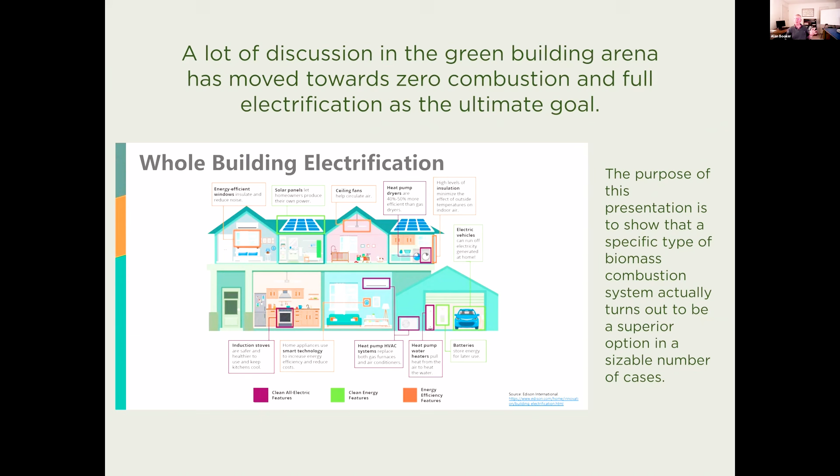Okay. So the purpose of this particular presentation is to show that a specific type of biomass combustion system actually turns out to be a superior option in a sizable number of cases to full building electrification. So I came up with the term carbon negative mass heater because, of course, one of the huge things you hear over and over again is carbon and carbon accounting. I'm a member of several different groups that are looking at the carbon footprint of everything, the carbon footprint of a building, both embodied, how much does the building take to build, and also operational carbon.

Yes, Paul. Thanks for noticing my hand. I was wondering if that would work. But I wish to ask a political question, if you don't mind. Okay. And that is, clearly you are a man of science and climate change. Yep. Are you a person who says yes, no, or maybe?

Yes, the climate is changing. That much is completely clear. I'll put it to you this way. I go out and I talk to fourth and fifth generation farmers on the land, who have history on the land back four or five generations. And to them, there is absolutely no question that what they're seeing today is different than the family history on the same land for four or five generations. So the climate is shifting, and that is, to me, highly evident.

And so what I would say to that is that climate change, however, is a symptom of a complex of much deeper problems. So if you come to listen to everything I have to say at, for example, the permaculture design certification course, we'll talk about climate change a little bit, because I'll talk more about how we have to change our designs to deal with it. But I spend a lot more time dealing with the underlying issues and how to regenerate natural ecosystems, because if we can do that, we'll solve problems like climate change.

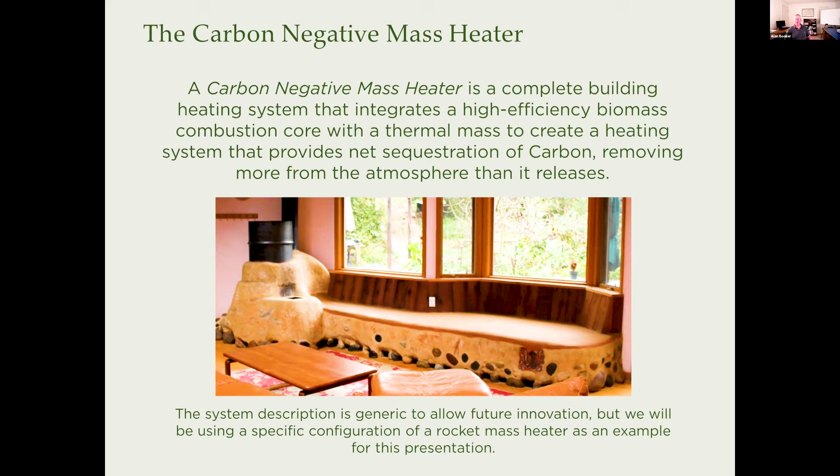So a carbon negative mass heater is a complete building heating system that integrates a high efficiency biomass combustion core with a thermal mass to create a heating system that provides net sequestration of carbon, removing more from the atmosphere than it releases. So as I said, this system description is generic to allow for future innovation. But we're going to use a specific configuration of a rocket mass heater as an example for this presentation as we get into the details.

Okay, so first we have to talk about the carbon cycle just quickly, because we're going to call it a carbon negative mass heater. We kind of need to talk about that, right? So this particular diagram is just a quick example of the kind of carbon accounting that we do as we start trying to figure out how in the world we're getting to the point where we're now over 400 parts per million carbon dioxide in the atmosphere, when pre-industrially it was down below 270, right?

And so we see here in blue what we call pools, that is places that carbon is held. And then in the red, you see fluxes, that is places where carbon is moving from one pool to the other. And these numbers give you a rough feeling of about how much there is. Notice what's interesting here is plants, soils, and atmosphere, just to give us an order of magnitude, okay? So these are petagrams, by the way, but let's just look at relative numbers.

750 petagrams in the atmosphere about now. Plants are around 560, but soils are around 1,500. In other words, we have about 3 times as much carbon sequestered in the soil as we do in plants, round figure. And what you're going to find is the way that I have engineered the carbon negative mass heater takes that dynamic into account quite a bit. We're going to dynamically sequester the carbon into plants and soil. That's what we're going to do in this process to become massively carbon negative, pulling carbon out of the atmosphere and pulling it into the plants and the soil, okay?

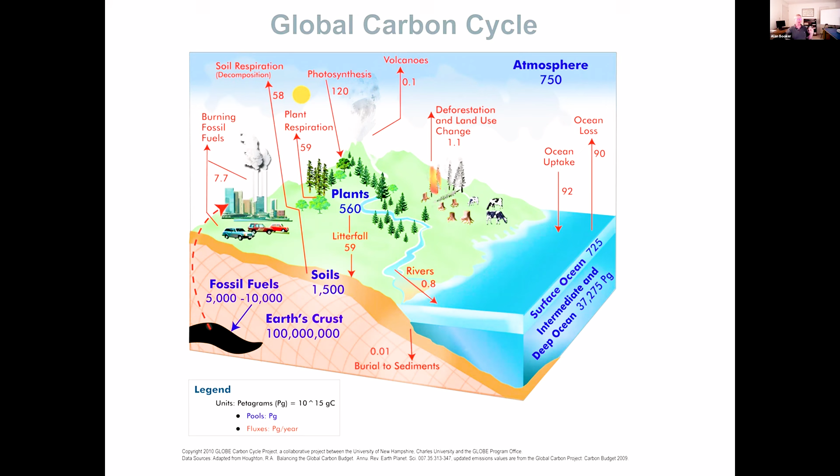So I have a definition that I use when I'm presenting to technical audiences. This is my definition. People are starting to pick it up. And it's what I call dynamic versus static carbon sequestration, because to me, they are very different kinds of dynamics in the carbon cycle. Dynamic sequestration is when carbon becomes involved in a life process that keeps it out of the atmosphere during the period the carbon is involved in that process. Typically, some carbon atoms are leaving as others are joining, but the net total carbon sequestered is either constant or expanding while the life process continues.

And that's where we talk about the plants, but also the soil, because a lot of soil organic matter, which is where we generate a lot of what's called soil organic carbon, is created by life processes, specifically microorganisms in the soil, either saprophytically breaking down organic matter from the soil surface, or actually to a larger degree, building soil organic matter based upon carbon given to them by the exudates of plant roots. So that is what we call dynamic sequestration, because obviously, if you cut down the forest and burn it, it goes back into the atmosphere. If you get rid of the living cover over land, then the soil organic matter will begin to break down, will photooxidize, and

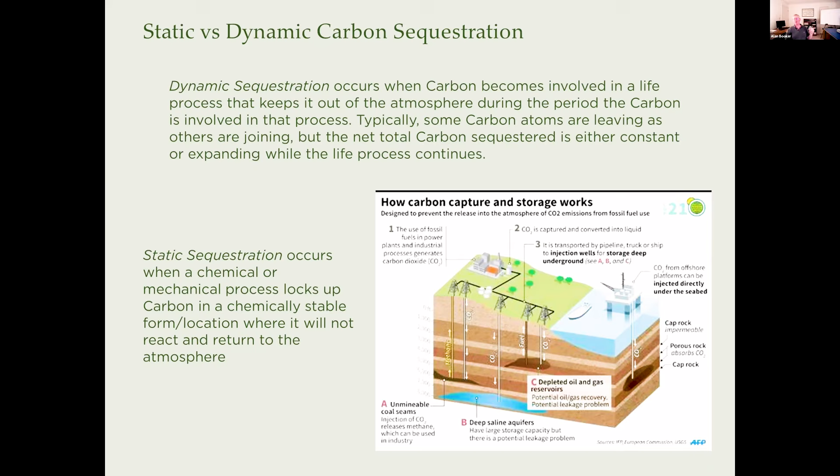But if you want to pull what we already have in the atmosphere back into some sort of sequestration, then dynamic sequestration has a lot of advantages because it is a process that we can do for very low cost at very large scale. So, of course, where we are is that fossil fuel carbon release has been taking carbon that was statically sequestered in the earth and turning it into carbon dioxide. That's why I said before, we were raising levels from around 270 parts per million before industrialization to over 400 parts per million today.

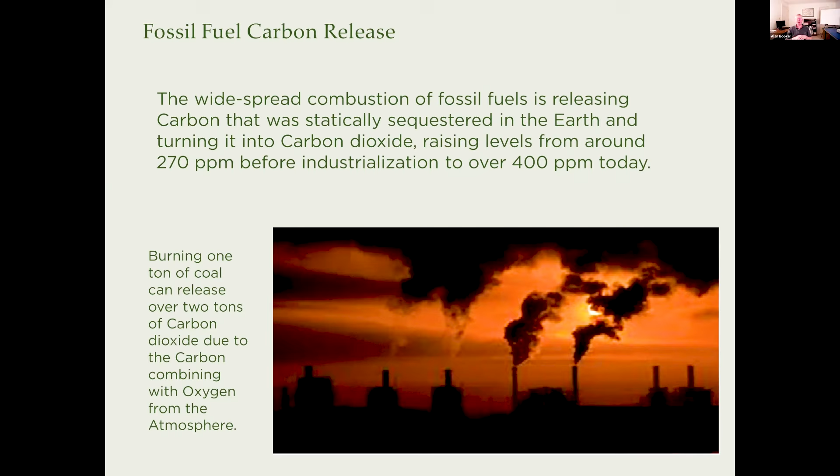And so when we start talking about tons of carbon dioxide, you have to realize that burning 1 ton of coal will release over 2 tons of carbon dioxide because coal is almost pure carbon. It's very high carbon. So you get a ton of coal and you burn it, then the carbon is pulling oxygen atoms out of the atmosphere and burning them. And now the atomic weights of the carbon and the oxygen are combining to create a heavier thing called carbon dioxide, which is why burning a ton of coal actually releases over 2 tons of carbon dioxide into the atmosphere.

Okay, so this is where the possibility of dynamic sequestration comes in with forest carbon sequestration. There is also mangrove sequestration, which is huge. And then there is sea forest sequestration, which can also be huge. But for what we're looking at today, the part of the carbon cycle that we're looking at as our sequestration mechanism is the carbon cycle of terrestrial trees.

Most people don't think about it, but when we think of a tree, we think of a tree growing up out of the ground. And that's actually not a completely accurate way of visualizing it, because 90-some% of the mass of a tree comes from carbon, oxygen, and hydrogen. And the vast, vast majority of that carbon is actually pulled out of the atmosphere via photosynthesis. And of course, water comes in from the roots, and oxygen coming in from certain other processes.

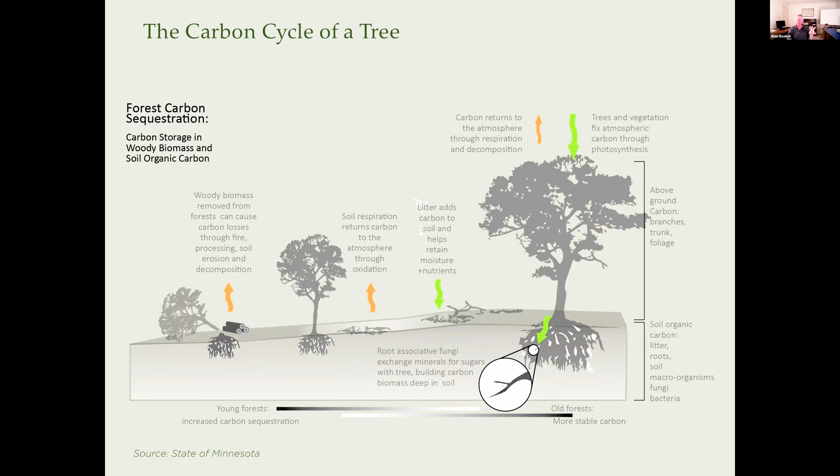But it's almost as accurate to think of a tree as condensing out of the atmosphere as it is to think of it as growing up out of the soil. That's how much of the mass of the tree is coming out of the atmosphere, right? And at the same moment, you have to realize that there's a huge amount of excess energy from photosynthesis going into exudates into the soil that's feeding the soil life to create soil organic matter. And it can actually outdo the amount of carbon that we end up sequestering in the biomass of the tree over time. So we have to look at both of those in order to think about how we're pulling carbon out of the atmosphere, right?

You pull it up out of the ground, you burn it, and then the carbon goes up into the atmosphere, at least until we figure out a way of capturing it at combustion and putting it back. But of course, when you burn it in something like a vehicle, that's open cycle for now. We don't know any way of grabbing the exhaust coming out of the back of your vehicle and taking that carbon and doing something with it, right? Maybe we could retrofit power plants and other fossil fuel burning things, maybe, we'll see.

But in the closed loop biomass, what we end up with is growing forest removing carbon from the atmosphere. And then of course, bioenergy from forest biomass can substitute for fossil fuel energy. Well, that gets really big and industrialized. I find that a lot of our regenerative systems work better as a smaller, lower tech distributed system, which is what we're going to be talking about here. And then when you combust it, part of that carbon dioxide is returned to the atmosphere, but only part. And that's where our possibility is.

Now, one of the big complaints about biomass combustion has been that there are a lot of biomass combustion approaches where they're cutting down forest over here and turning it into something like pelletized biomass, and then putting it on trucks and shipping it a couple states away and burning it there. And as soon as you do that, you've got several problems. And that's not the system we're talking about. As a matter of fact, you're going to see we have defined the system that's not allowed.

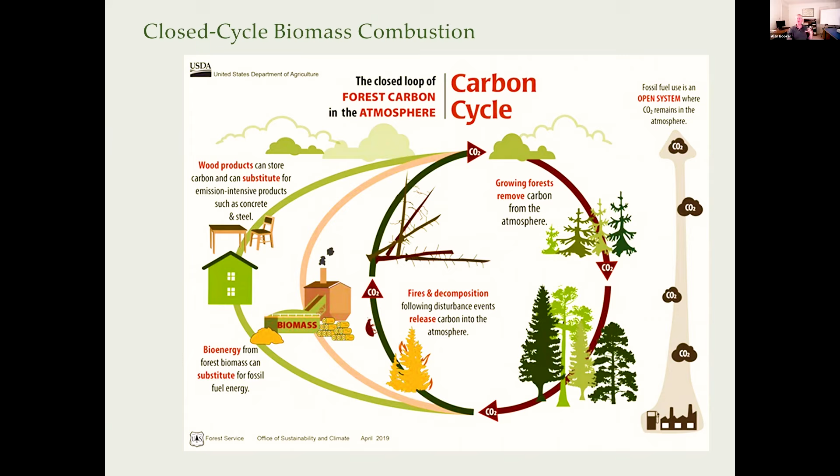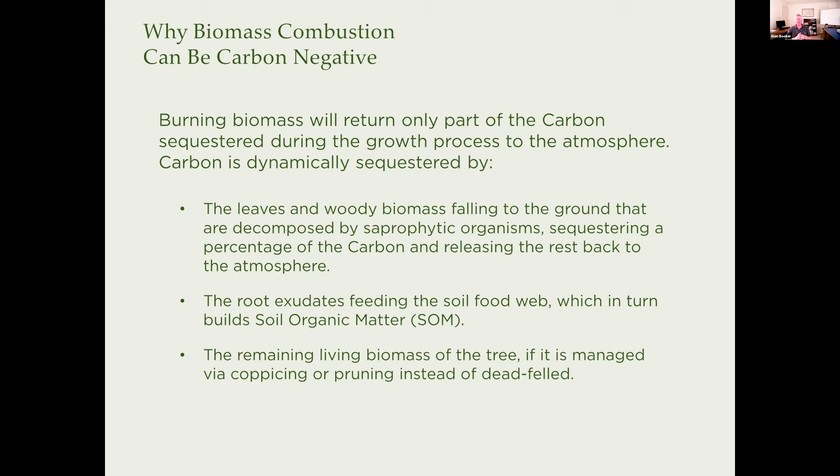Okay, so now let's summarize why biomass combustion can be carbon negative. Burning biomass will return only part of the carbon sequestered during the growth process to the atmosphere. Carbon is dynamically sequestered by the things I've mentioned before: leaves and woody biomass falling to the ground, being decomposed by saprophytic organisms, roots feeding the soil food web, and the remaining living biomass of the tree if it's managed via coppicing or pruning instead of dead fell.

Okay. All right. Now let's get to the definition. How are we going to define a carbon negative mass heater? It's a system, and therefore let's define the system components. The first component of the system is on-site or local regenerative biomass production. Regenerative biomass production that builds soil organic matter is the key to making the system carbon negative. Keeping production on-site or hyper-local eliminates embodied energy of transport and the problem of cutting ecologically important forests for biomass.

Production options include coppice, pruning, stormfall harvest, or regenerative forest management. And that could include proper regenerative thinning cuts and other regenerative forest management techniques practiced locally, okay? Our case study, when we get there, is going to be of the coppice system. And the reason is I'm able to show exactly how carbon negative we can go using a bunch of research we found on coppice, okay?

But stormfall would include some of the things, Paul, you've talked about, which is you can go out and gather sticks and wood and so forth that just comes to the ground during storms. You can use pruning as you go in and prune food forests or other areas, or actually any wood that comes from very local on-site regenerative forest management.

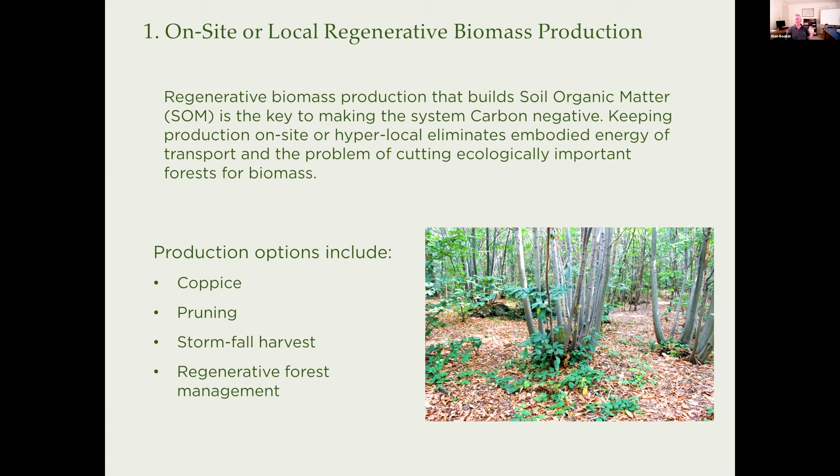Our goal here is to, as you'll see, there's other components here that are equally important. And the next component that we go to is to drastically reduce the amount of wood we need so that the number of cases that we can do step one is much higher.

Yes. I want to ask something from the previous slide real quick. You've shown a lot of different systems for where our carbon might be coming from, and in order for it to be a carbon negative mass heater, then the fuel source is critically important. Yes. I'm getting to the point now where I think that there could be an apartment somewhere, and it could be heated where they have effectively a rocket mass heater. And I don't know, maybe we could make some modifications to a rocket mass heater, or maybe as is it'll work.

But for the most part, having them save their cardboard boxes that they get, like they had something delivered in a cardboard box over the summer, and they saved all of that. And then if they were able to heat their apartment over the entire winter using nothing but the cardboard boxes and other papery goods that they naturally accumulated in their waste over that year, would that qualify in your mind as a carbon negative mass heater?

I have to do the numbers on that. I can't tell you right now. My feeling is that we're going to have to run all the carbon numbers. You're going to see we're running numbers here. We're not just waving hands. So I can't answer that question.

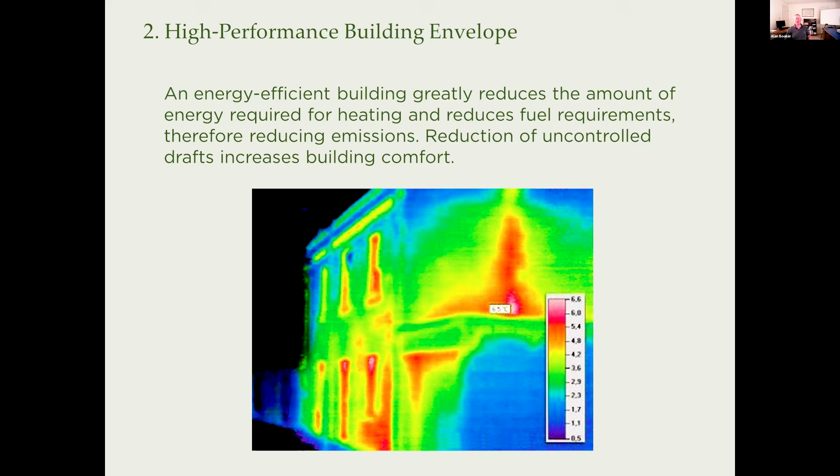What you're seeing here is when we do HERS ratings, which is Home Energy Rating System ratings, we use infrared cameras like this to see where the buildings are losing significant amounts of heat in the wintertime. And so one of the aspects of this system is that it's coupled into a high performance building envelope, right? And there's a couple different ways we can do that.

Strategies would include a properly insulated building. As you saw, I'm a green roof professional, so I use green roofs on buildings, drastically reduces the energy footprint, and also cooling, drastically reduces cooling when done properly, passive solar gain, and thermal mass and thermal inertia. We use all of these strategies so that we move towards the rocket mass heater or the carbon negative mass heater being an auxiliary heat to some other methods, such as passive solar and annualized thermal inertia, or daily thermal inertia, according to where you are, right?

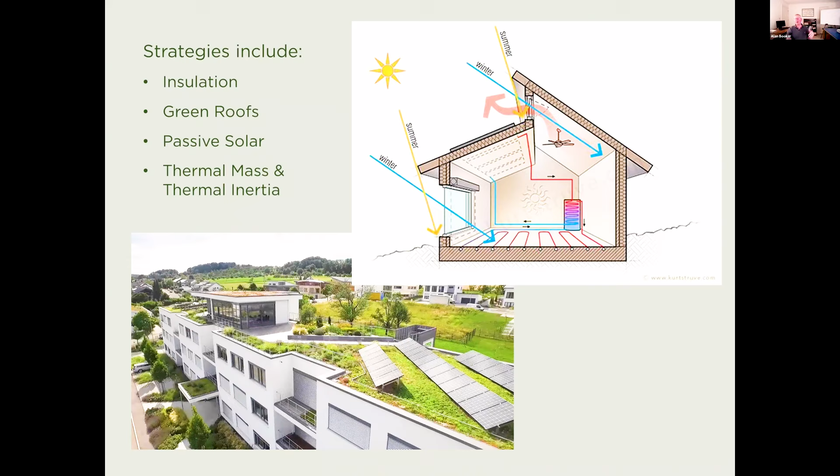Because according to where you are, your thermal inertia strategies are different. If you're in a, again, desert environment with high diurnal swing, then you might be doing diurnal thermal inertia. If you are in an area like Montana, you might be doing annualized thermal inertia. That's a valid way of doing it. Passive solar is available in many areas in the temperate zones, and green roofs are a huge moderating effect. And I don't have time to get into all that, but those are some strategies we can use.

Okay. Third part of the system, makeup air and IAQ management system. This has to be engineered into a carbon negative mass heater system. So a combustion heat system needs a low resistance source of air for efficient operation. Many manufactured approaches, that's wood stoves and so on and so forth, use a fresh air vent coming from outside. But certain high efficiency combustion cores function better using room air. If this is the case, a source of makeup air is needed to replace what's being used by the heater.

Whatever the solution, it needs to maintain a high indoor air quality, IAQ. Remember, I'm having to build buildings that meet the WELL Building Standard, right? And so I have to think about, if I'm going to use combustion, here comes the next set of questions. What about indoor air quality? So we're going to have to address that, right?

So if the building is not tight, air will be pulled in through cracks, creating drafts and reducing performance. If the building is tight, this can create negative pressure, causing a number of problems. And in the worst case, it can cause backdrafting, right?

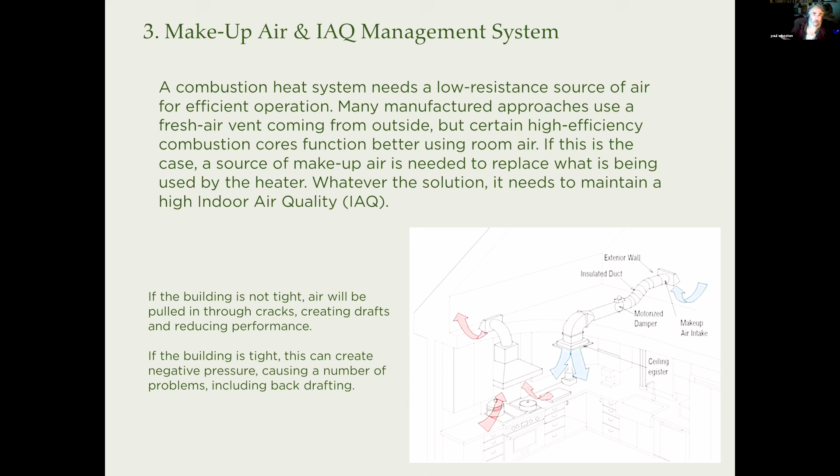So one possibility, if you want the high-tech solution, is a DOAS with ERV. Yes, these are the industry terms for it, right? A dedicated outdoor air system called a DOAS. Here's the thing, when you are in a system where you have an engineered heating and cooling system and you are heating with radiant heat, the radiant heat does not solve your ventilation problem, right?

So if you have a bunch of people in the room, even if the mass heater is not contributing a single bit of carbon dioxide to the room, the people are. And you'll start seeing the carbon dioxide build up in the room. So even if the carbon negative mass heater is providing all the radiant heat you need, you still need ventilation if you have enough people in the room.

Now, we've been doing some measurements. One of the architects I'm working with, Gary, has been measuring CO2 in his bedroom when he and his wife are sleeping. There's nothing except a radiant heater in there, and there's no demand ventilation. He just closes the door and they sleep at night, and they see CO2 going up to like 1,500 parts per million as they sleep, which actually contributes to poor sleep. So he's had to actually do things to remediate the ventilation.

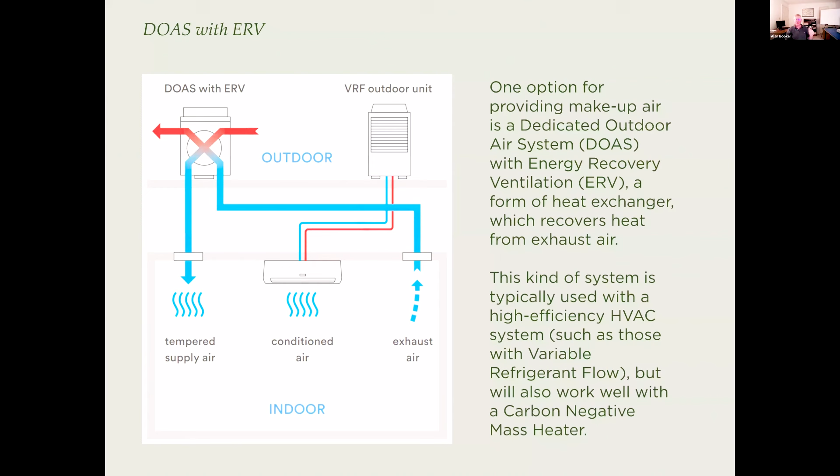So you could use a DOAS with an ERV. And in certain larger building situations, that's where we might have to go. If you want the low-tech version, or maybe the higher-tech version, because it actually is completely passive, you can use passive geothermal ventilation with annualized thermal inertia. And this is a conceptual diagram of something I'm using here in the Southeast right now.

We are basically putting about a 120-foot run on this pipe, okay? You can see there's an intake well out at one end, and then what's called the ATI, annualized thermal inertia, zone around the pipe. It then bends up at a 45-degree elbow, because a 90-degree elbow would present a huge amount of resistance to passive airflow, right? And the whole thing drains away from the building at a minimum of a quarter inch per foot of run. And what you end up with here is you design the building for passive chimney effect.

As the rocket mass heater is heating, the hot air rises and a little bit of it escapes out the top as a chimney, and it pulls fresh air in. So we're using the energy that's coming from the rocket mass heater to drive the ventilation as well, okay?

Now, the fun thing that's happening is that this is engineered in such a way to create a 6-month lag. So when you do ventilation in the wintertime, the ATI zone around the pipe has been pre-warmed over the summer. And then over the winter, you're pulling heat out of it and chilling it.

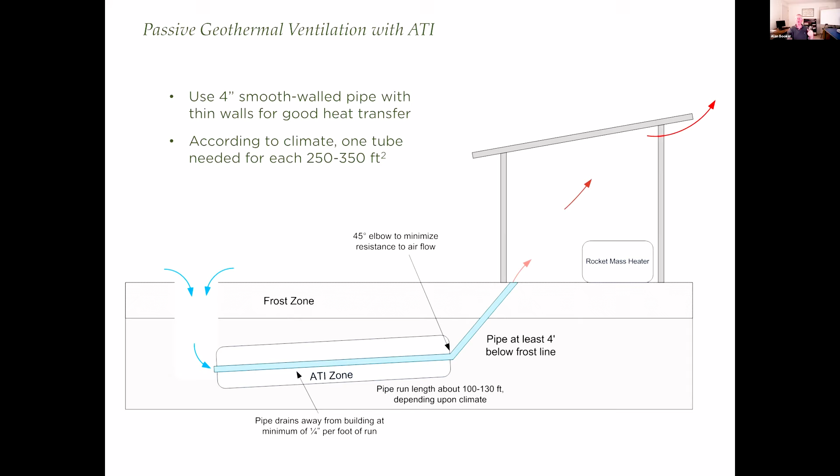There's some details we can get into in full detail. But if we're in a high radon area, we would have to engineer for that. Okay. So yes, you can engineer for that. But again, this is designed where we can run cleaning through the pipes quite frequently. It's just part of the maintenance of a system like this. And we'll just kind of go on from there.

So let's talk about IAQ measures real quick. So I always design to meet tier 2 of the enhanced air quality requirements of the WELL Building Standard. For people who are familiar with the WELL Building Standard, this is version 2. And so what that means is that I'm wanting to make certain that PM 2.5 is 10 micrograms per cubic meter or lower, and that PM10 is 20 micrograms per cubic meter or lower.

Now, what in the world is PM 2.5 and PM10? For those who aren't familiar with all this verbiage, PM, of course, stands for particulate matter. 2.5 stands for 2.5 microns or smaller. 10 stands for 10 microns and smaller. And they tend to come from different places. A lot of your fine combustion particles can come as PM 2.5, but there's other things that can come in under PM 2.5, including pollen and so forth. Some of your larger dust particles come in as PM10 and so on.

So we're trying to make certain that we have in the building these very low particulate matter levels, which means we can have no backdrafting. If we have backdrafting, we're going to get particulate matter into the air of the building. That means that makeup air has to be done properly so that we never backdraft, right? And that the system has to be designed to run properly so that there is no backdrafting.

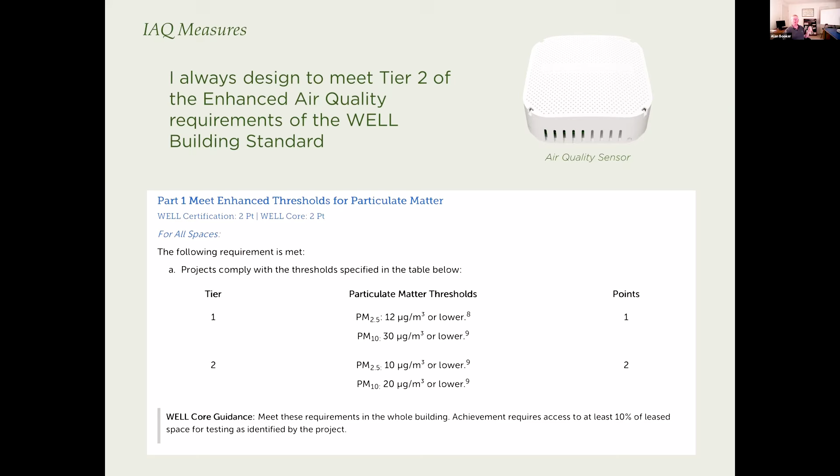If PM goes too high because of the heater, it's not designed right. It fails the standards for meeting the definition of a carbon negative mass heater. Okay. Another thing is organic gases, also known as volatile organic compounds.

I see Bo has a question, so let me see if we have anything we need to address real quick.

Yeah, Jim asks what should be the separation if using more than one pipe in such a system. Yeah, I typically am trying to get one every about 250 to 300 square feet of building. And so I try to keep them at least 10 to 12 feet apart, because you don't want them to run into each other's ATIs, right? And the ATI zone typically can be 4 or 5 feet around. So I try to keep them far enough apart that they each have their own ATIs.

Okay. Anything else, Bo? No, that's great. Thanks.

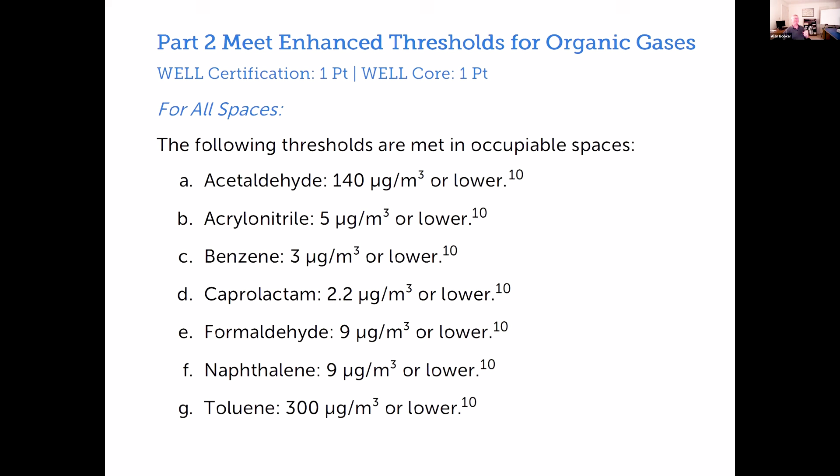Okay. Part 2 of the enhanced is the volatile organic compounds. Well, if you build a carbon negative mass heater out of the materials recommended, then it will not off-gas any of these, either into the building or as external exhaust. So don't have to worry about that. How about carbon monoxide and nitrogen dioxide?

If you have a properly running carbon negative mass heater, during combustion, you will meet this in exhaust outside the building, right? Which is really funny because this is indoor air quality, right? And if we're drafting properly, no carbon monoxide; if any is being made during the beginning or the end of the burn, what little bit is being made should be going up and out the chimney. It should never be coming back into the building. Same thing with nitrogen dioxide.

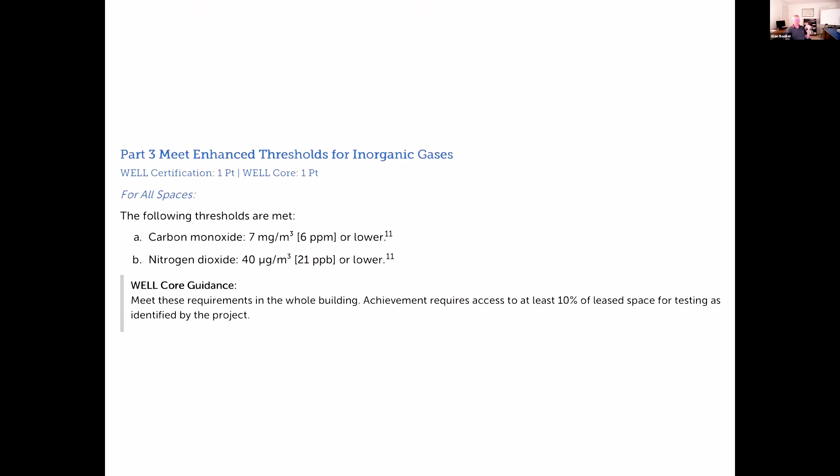If we have a properly running, for example, rocket mass heater, in most cases during the clean part of the burn, which is the vast majority of the burn, these two would be met at the exhaust coming up the chimney, okay? So we're meeting all of that, right? And of course, the last one we want to look at is indoor carbon dioxide levels.

Now, the WELL Building Standard requires demand controlled ventilation, DCV, to maintain regularly occupied spaces below 750 parts per million of carbon dioxide. I personally prefer 650 parts per million as the upper limit, because sensitive individuals start to feel it above 650. So what I'm looking for is a demand ventilation system that's bringing in enough fresh air to keep the indoor ambient below 650. 750 would be my high end.

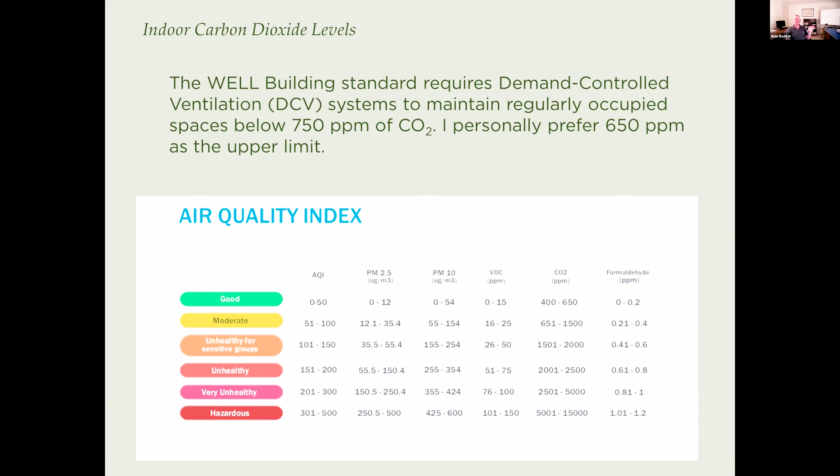You'll see some places that set their demand ventilation at 850 or even 1,000. I don't like that at all, because I think that up to 1,500 is moderate. There has been research, I won't cite it all here, that people start to get very measurable decreased cognitive function at 800 to 850, okay? So I try to keep it around 650, definitely below 750, okay?

So now we get to part 4, right? We had our fuel source, our high performance building envelope, our makeup air and IAQ component. Now we get to the next component, high efficiency combustion core. I want to see at least 90% efficient combustion, which means we have to have a secondary burn that burns probably above about 2000 degrees Celsius to get complete combustion of pyrolytic gases that are coming around the burn.

I see Paul has a question. Yeah, above 2000 degrees Fahrenheit, I think, is difficult to achieve and possibly not desired. But you're saying Celsius. So what does that work out to? If I'm doing the math right, isn't it double? Not quite. I was using some numbers out of this book. Let me go back and double check that. I may have swapped them out.

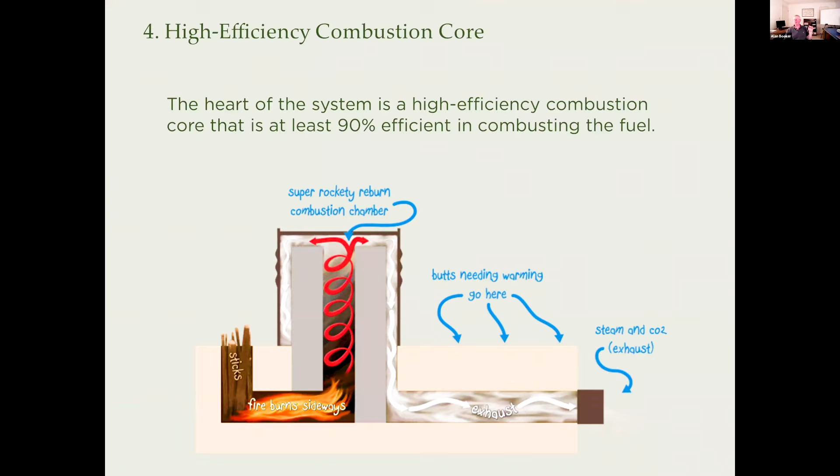I think if we're going over 1800, we are doing amazingly awesome. That is dreamy. And then somewhere around 2300 is where we don't want to go. We don't want to get that hot. So I'm not actually specifying that in the written spec. I'm just saying that we have to have over 90% efficient in combusting the fuel. Okay. So I'm trying not to be too prescriptive. I'm just basically saying we have to have the super high efficiency, right? True efficiency as well, not the labeled efficiency that comes on modern wood stoves. Right. Now I'm talking about actualized work.

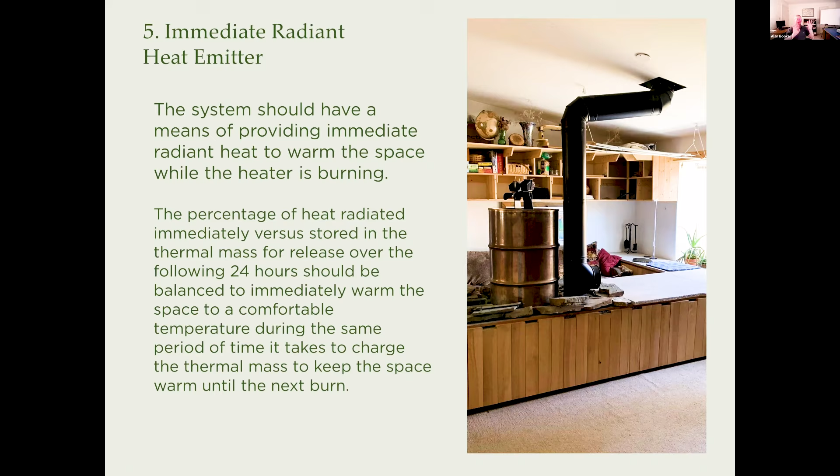So part 5, immediate radiant heat emitter. So the system should have a means of providing immediate radiant heat to warm the space while the heater is burning. The percentage of heat radiated immediately versus stored in the thermal mass for release over the following 24 hours should be balanced to immediately warm the space to a comfortable temperature during the same period of time it takes to charge the thermal mass to keep the space warm until the next burn, right? So this is part of your engineering for any carbon negative mass heater, is to engineer that percentage balance between immediate radiant heat and thermal mass, okay?

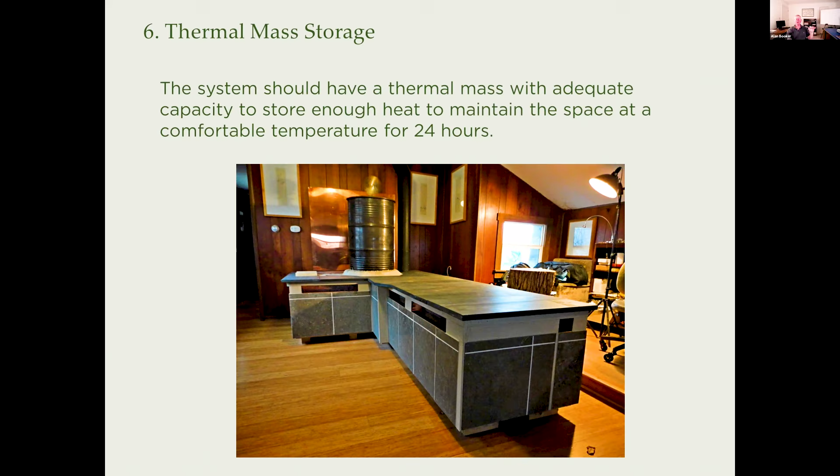Part 6 is their thermal mass storage. Probably we want about 24 hours. We're going to try to go for a system ideally that gives us a daily burn, right? So we'd like to have enough thermal mass that when we store the excess heat coming out of the system in the thermal mass, that once we've charged it, it can maintain comfort heat for 24 hours, okay?

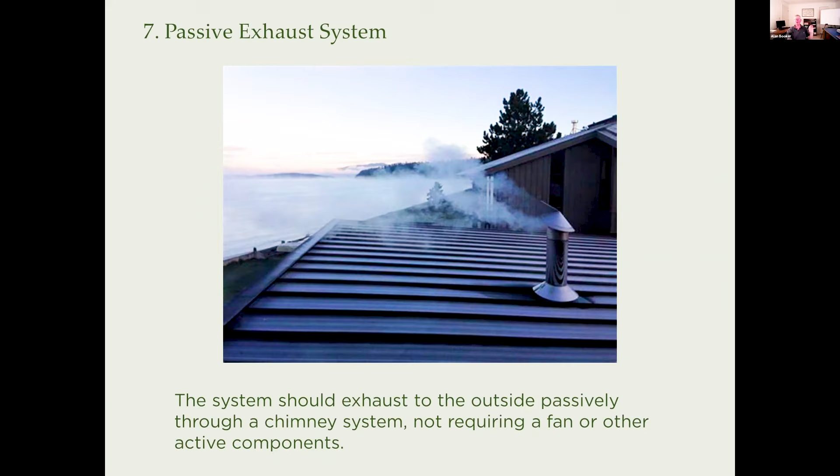Part 7, a passive exhaust system. The system should exhaust to the outside passively through a chimney system, not requiring a fan or other active components, okay? For a lot of reasons, including system robustness and everything else, passive exhaust is highly desirable in a carbon negative mass heater. And what we have here is a picture of what typically comes out the exhaust, which is almost completely water vapor and carbon dioxide. That should be almost 100% of what's coming out of that chimney, okay?

And the 8th component is the long burn operational cycle. Since the dirtiest parts of the burn happen during startup and burn completion, the ideal is to maximize clean burn time versus startup and shutdown time. To do this, the operational cycle should ideally be designed for a single long burn each day, with the thermal mass carrying the system over to the next day's burn. We don't want to start it up, close it down, start it up, because every time we do that, we lose efficiency in the system.

And those are the few moments in which we have less than optimal burn, and we can release a little bit of particulate matter, possibly a little bit of carbon monoxide into the system. And so we'd like to reduce that inefficient burn to the smallest percentage of time possible. And the best way to do that is to have a long burn operational cycle instead of a frequent stop start. Yes. Somebody is asking a question in the chat.

Clay is saying, why is a daily burn preferred over less frequent burns? We would love to get to the point where the other parts of the system are efficient enough that in many cases you don't need to do a burn. So we would love for your passive solar, your high performance envelope, your thermal inertia, all of your other things to be like, I don't need to burn today. When I say daily burn, what I'm saying is, let's just say that it's super cold out there, right? And that it's overcast, you're not getting passive solar, that sort of stuff.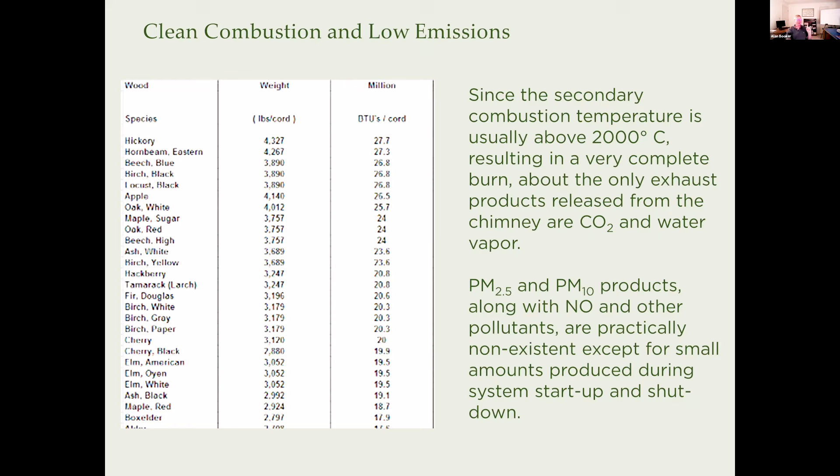Okay. And what I have here, by the way, is a table showing the BTUs per cord for a lot of properly dried wood. You might want to look and see if poplar is on this one, because we're going to use poplar coppice as our case study in a moment. Okay.

How about high combustion efficiency? The combustion efficiency of a well-tuned system can be around 95% in real-world situations, well above the realized efficiencies of other so-called high-efficiency wood-burning heaters. The result is much more of the fuel's theoretical heat capacity being released to become available to the rest of the system. This is how we're getting so much higher full system efficiency, is we're getting true high efficiency combustion, right?

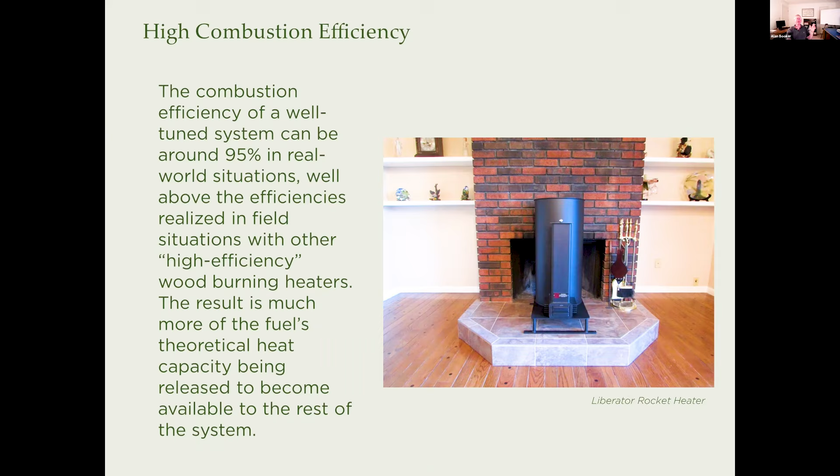But we also have high heat retention and use. Because we are storing the heat in a thermal mass before it goes up the chimney, the exhaust temperatures are much lower than in other wood burning heaters. In other words, this is another place where we have a huge advantage in system level efficiency. The exhaust from fireplaces and wood burning stoves is usually 600 to 800 degrees Fahrenheit. Masonry stoves normally exhaust between 200 and 400 degrees Fahrenheit. And a good mass heater's exhaust is normally under 200 degrees Fahrenheit, often under 150 degrees Fahrenheit if the system is properly designed and properly optimized.

So if you think about the difference between 600 to 800 degrees of exhaust going out the chimney, how much heat is coming out of the chimney and being lost to the outdoors. This is another place where a lot of wood burning systems lose system level efficiency, and that's why they're so much lower. It's why Paul keeps on telling you that you can heat a house with a tiny fraction of the wood. And of course, the exact fraction is dependent upon compared to what? A well-tuned masonry heater, or a catalytic wood burning stove, or a lesser efficiency wood burning stove. It can be a third as much to, in some cases, a tenth as much, according to what you're comparing it to.

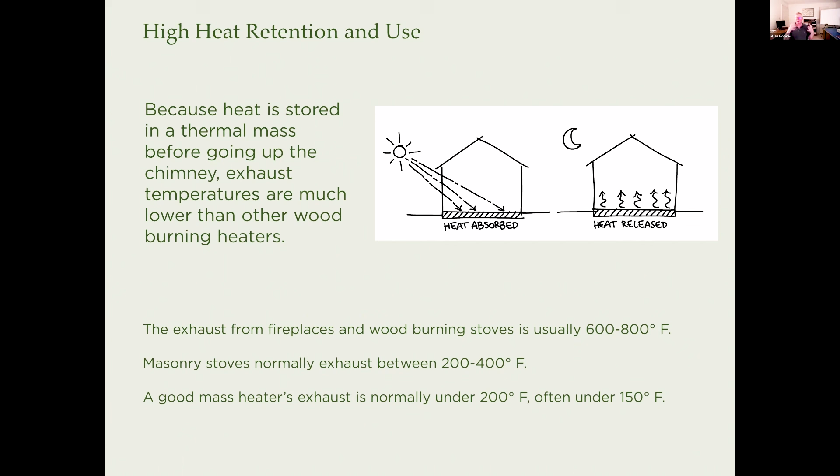I think laying it out that way might help people understand what you're talking about a little better. Because as an engineer, when someone says it heats with 1/10 the wood, I'm like, compared to what? Give me your baseline of comparison, because otherwise I'm not certain where we're going. Right. I've always gone with conventional wood stove. Yeah, and to me that phrase means basically a metal box with a chimney on top of it. Okay.

Another attribute of the system: low embodied energy. We define embodied energy as the energy used to produce a product, including the energy needed to extract and mine, process and transport raw materials, manufacture and ship subassemblies, manufacture, pack, ship, and deliver the final product. A large percentage of a typical mass heater is the thermal mass, normally sourced from local natural materials. The manufactured components, such as fire brick and steel, are long-lasting and a small percentage of the mass. The passive design means no electronics, so none of that embodied energy, embodied pollution, embodied carbon.

So when we start looking at what it takes to build the system. And also, if I'm running an electrified system, and I'll get back to this later, then I have this little dirty secret. The electrical cable goes somewhere, right? It's connected to a thing called the electrical grid, and that has a huge, huge footprint.

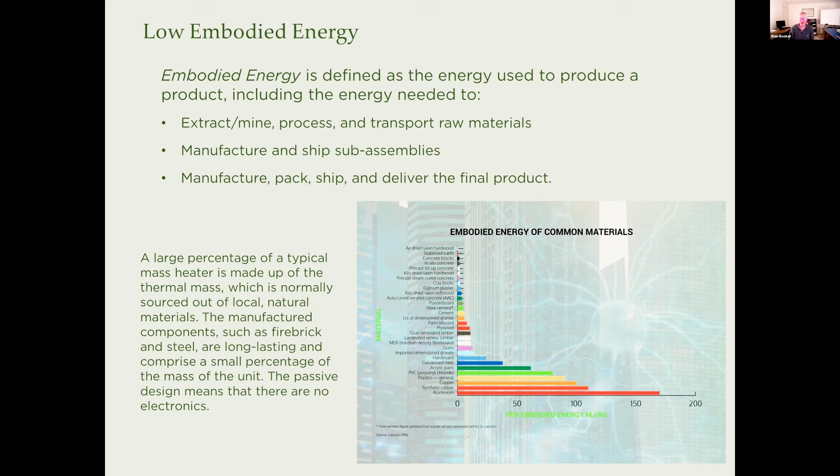And that's something that we actually calculate when we build buildings: what's the embodied energy, what's the embodied carbon. And I also like to calculate what's embodied pollution, okay? So there's a metric here, and what you're saying is that your carbon negative mass heater has to have a number on this scale that's less than.

Yeah, what we're saying is an attribute of the system is it will have a very low embodied carbon compared to its competitors, right? It will also have low embodied pollution. It's defined as the amount of pollution created as a byproduct of manufacturing, packaging, shipping, and installing a product. So the amount of pollution created in putting together a mass heater is much smaller than that of any conventionally manufactured HVAC system, and similar to that of a modern masonry heater, ballpark.

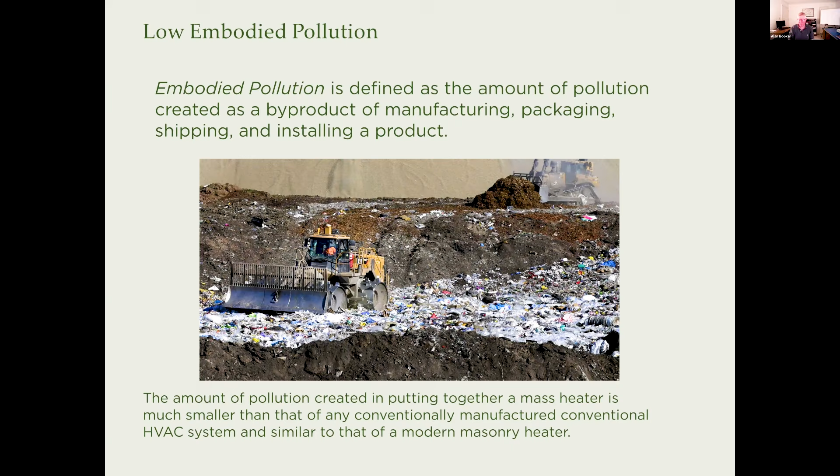Okay, how about low embodied carbon? Embodied carbon is the amount of carbon released into the atmosphere as a byproduct of a product's manufacture, packaging, transport, and installation. Embodied carbon is quite low, mostly coming from the fire brick and the steel used in construction.

What you're seeing here is I'm interested in what's called life cycle carbon, not cradle to gate. Cradle to gate is extraction of raw materials and then manufacturing it. The gate is when it goes out the back gate of the manufacturing plant, right? No, we need to look at the life cycle, which is transporting it, installing it, using it, demolishing it, recycling it, everything else. That's the only true metric. So we use life cycle carbon, not cradle to gate carbon.

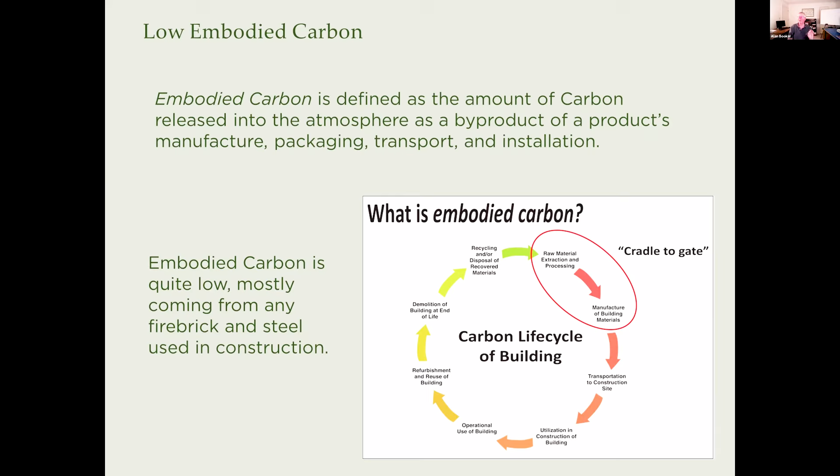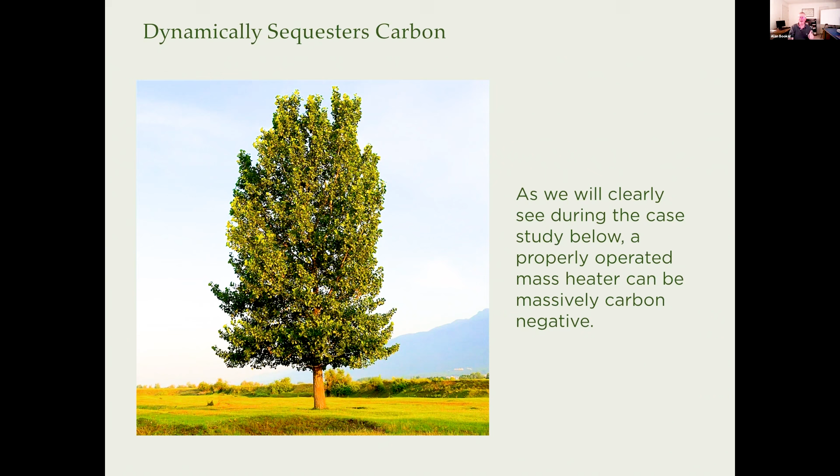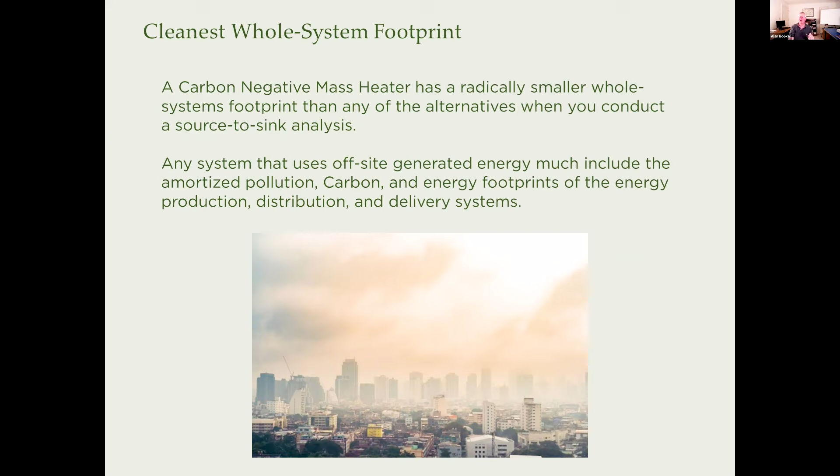Okay. How about the system dynamically sequesters carbon? As we're going to clearly see in the case study, a properly operating mass heater can be massively carbon negative, and it is the trees that are growing our biomass for us that allows that to happen. And it has the cleanest whole system footprint. A carbon negative mass heater has a radically smaller whole systems footprint than any of the alternatives when you conduct a source to sink analysis. Any system that uses offsite generated energy must include the amortized pollution, carbon, and energy footprints of the energy production, distribution, and delivery systems, okay?

And I would argue that it is biophilic. I do a lot of work in consulting on biophilic design, and biophilic design is becoming a huge thing in green buildings. There's an understanding that buildings have an impact on the people that are in them. They can isolate them from the natural world, or they can actually reconnect them to the natural world. And so there's a lot of dimensions to this. It's a huge field of design.

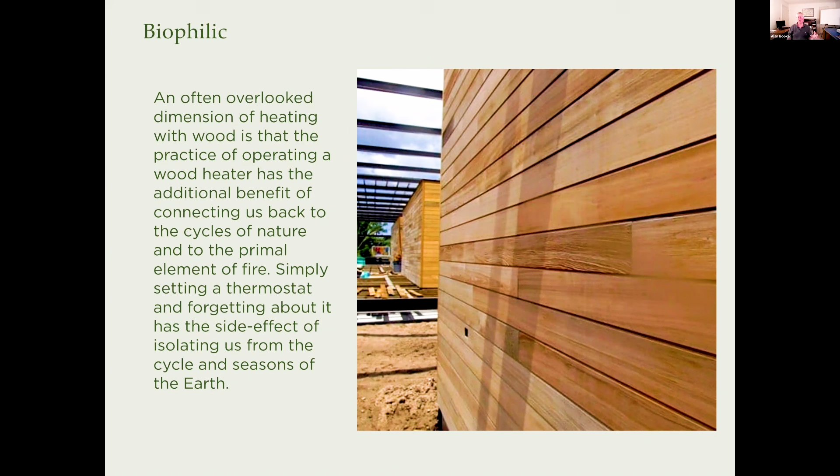But I'm going to argue that an overlooked dimension of heating with wood is that the practice of operating a wood heater has the additional benefit of connecting us back to the cycles of nature and to the primal element of fire. Simply setting a thermostat and forgetting about it has the side effect of isolating us from the cycles and seasons of the earth when we're inside the building. So I think this is an important dimension to finding a way of heating with wood that is extremely clean.

All right, let's go to carbon calculations for a sample case, with many thanks to Robin Stewart for helping me with this. Robin has her master's degree in chemical engineering. I forget how many patents, how many publications. She worked as one of the Environmental Protection Agency's lead carbon combustion specialists for, I think, close to 2 decades. So she is eminently qualified as a world-class expert to help me run these numbers.

Maybe we need to see Robin's credentials with her name, just like we saw yours at the beginning. Yeah, I need to pull that all up. I have her CV, which is many pages long, with all her publications and all her patents and all of her qualifications. I think it's safe to say that she is a world-class carbon combustion chemist. Okay, so I had her work with me to create this sample case. And here's the case study.

We decided to see how good we could get: fuel as dried poplar wood produced via coppicing on 1 hectare of land. We decided on this because we could get research for this, right? We also knew what the BTUs per cord should be for properly dried poplar wood.

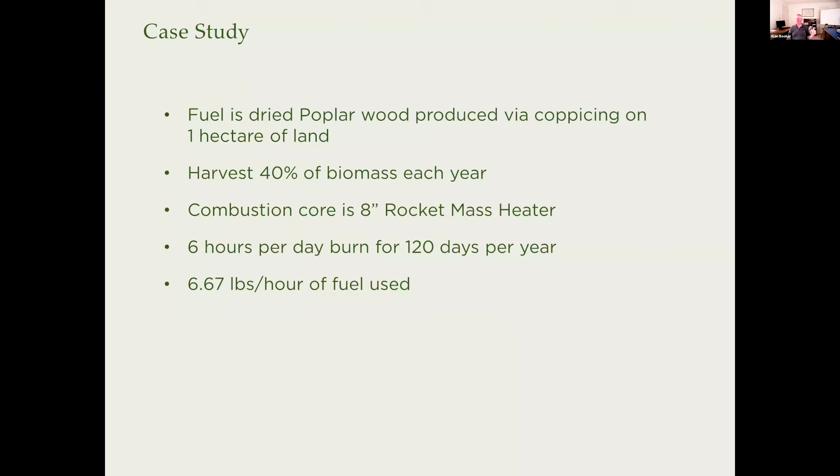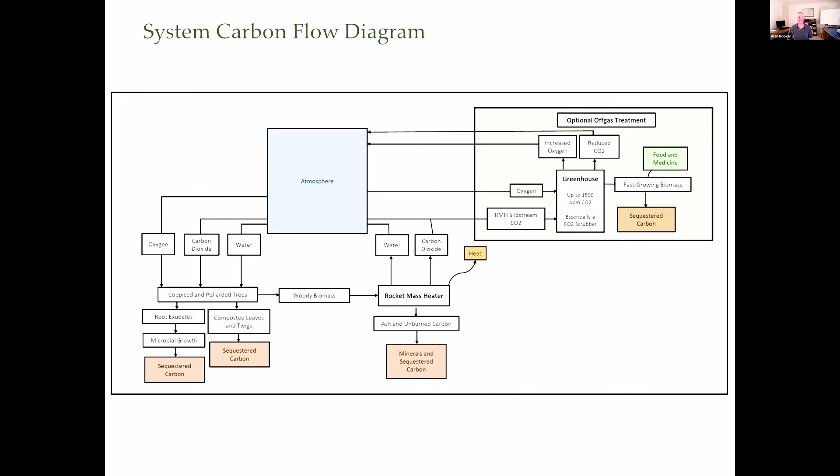We also documented that you could do a rocket mass heater slipstream CO2 to take some of the carbon dioxide and use a greenhouse as a CO2 scrubber, creating fast-growing biomass, but also releasing oxygen into the atmosphere and further reducing CO2 as an optional off-gas treatment system. So this is an option. We did not include this in our calculations, okay? So that's a quick and dirty carbon flow diagram. And now we're going to do the calculations.

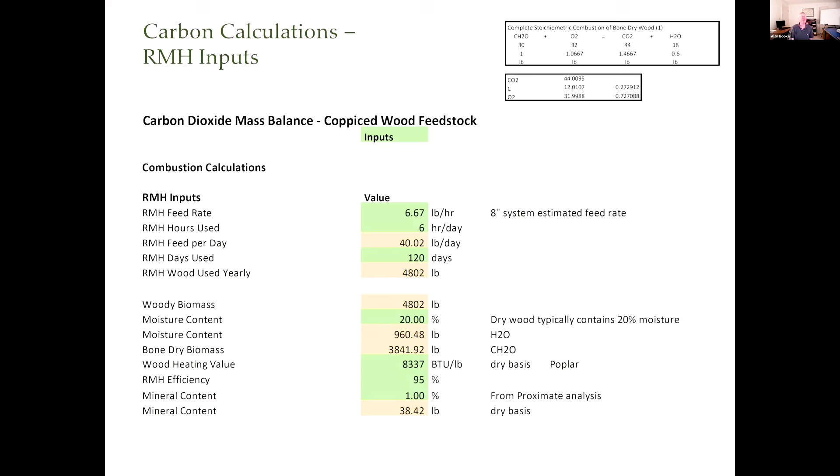So that's 960 pounds of water we have to drive off, and bone dry biomass of 3,800 pounds approximately. The wood heating value of dry biomass for poplar is 8,337 BTUs per pound. We're going to use efficiency of combustion of 95%, and we're going to have mineral content of approximately 1%, so that we're going to produce about 38.4 pounds of mineral content ash from all this burning. Okay, that's the calculations for the input side. How about the output side?

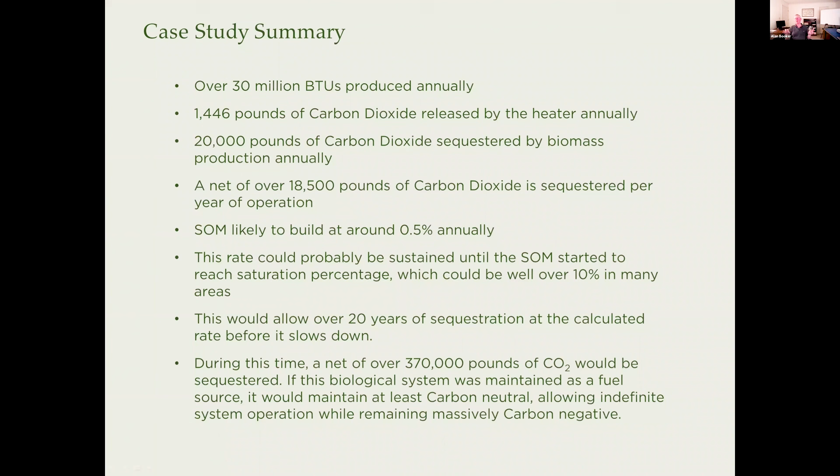Okay. We ran through all of this, and I asked Robin, I said, is there any case you can imagine in which we could create an electric version of a heater that had this little pollution, this little embodied energy, and was also carbon negative when we accounted for everything? Her response was to laugh. She just laughed. And she said, if you need an official answer, the answer is no. I can't imagine any way of doing that. Okay, there's our case study.

Okay, I want to jump in real quick and say, for that particular rocket mass heater, I know which rocket mass heater it is, and it's in a largish uninsulated structure. Yeah. And so basically, I kind of feel like if that structure were to be insulated and a few other things, it probably would need a quarter of that wood. Exactly. And so what you have outlined, as I'm hearing you describe it, I'm like, wow, that's a lot. But you left out the part of like, how big is the structure?

Where is the structure located? Right. All that stuff. And it's like, I understand why you did that. Exactly. And yeah, it's like, doesn't matter. Those are variables we're not going to touch with this. Exactly. So what we basically said is we have a reference 8-inch rocket mass heater with measured fuel consumption rate at full burn. And we'll operate it at that full burn. We know now how many BTUs it's going to give off.

Okay. Now we can take it to any building and say, we designed the building, here's how many BTUs, so on and so forth. We can run it at less than full load. We can do whatever. But we're just showing that if you ran an 8-inch reference rocket mass heater 6 hours a day for 120 days, you would burn up what we coppiced off of a hectare.

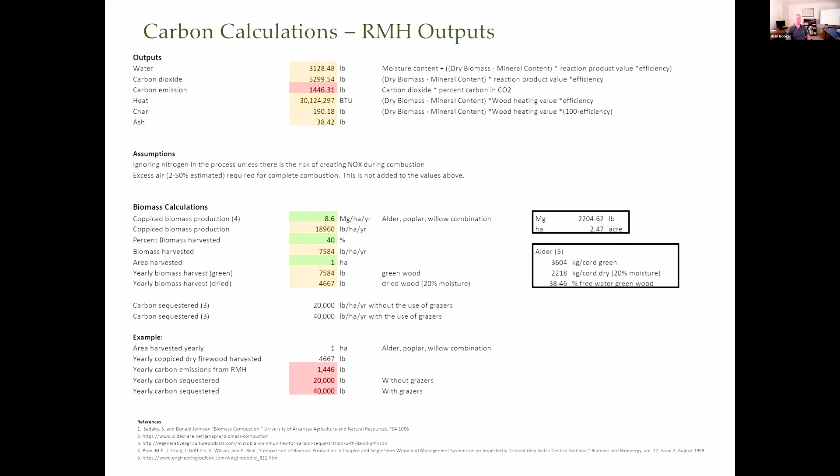Okay. Just so people know, my rough math says that what we're talking about here is 2 cords of wood, give or take a half a cord. It's probably in that neighborhood. Okay. So let's go to a comparison to alternatives, so we can finish up here. We have to talk about something called EUI, energy use intensity. When I'm doing LEED buildings and other things like that, I have to calculate EUI for the building.

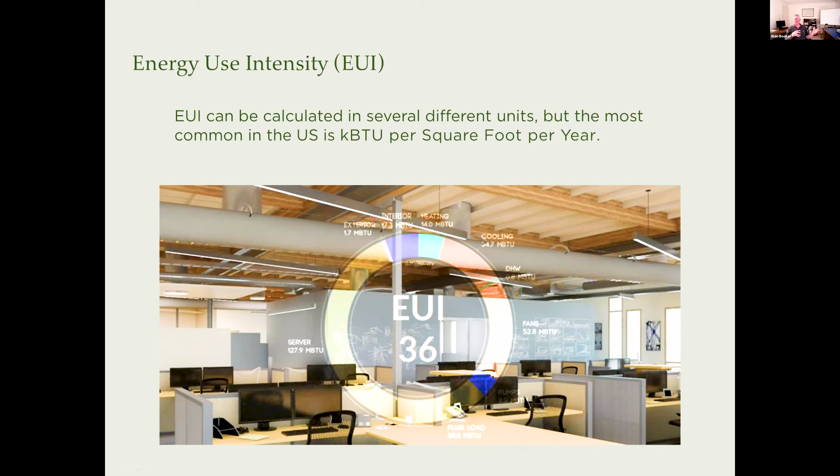It's calculated in several different units, but the most common in the United States is kBTUs per square foot per year. In other words, how energy intensive is this building? What you really want to know, in order to compare one building to the next, is how much energy does it use per square foot every year? So we convert all the energy you use to kBTUs, which is 1,000 BTUs, using these conversions.

Here's how you convert a kilowatt hour of electricity. Here's how you convert a cubic foot of natural gas. Here's how you convert a gallon of propane. So there are these conversion rates, right? You add up all the different energy uses and then divide by the gross square footage of the building, and that will give you an EUI. And we'll just say that a 156 is pretty dang bad. But that would be a realistic number.

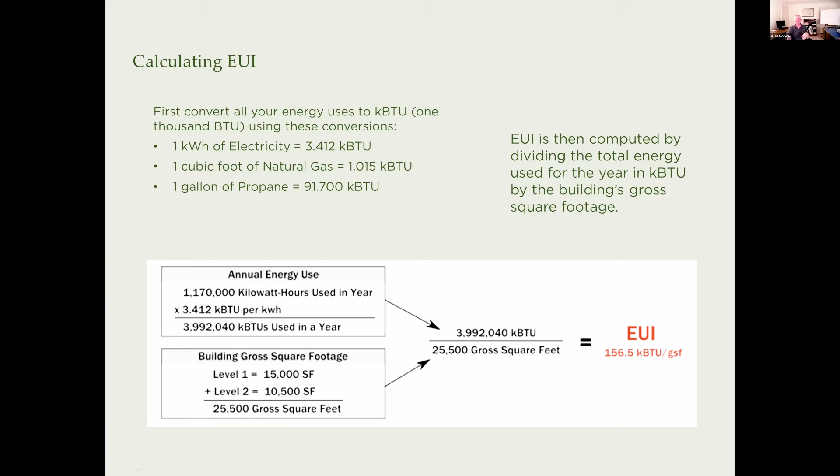However, I want to throw in something else you have to talk about: source versus site EUI. Because if you just calculate based upon, let's say, how many kilowatt hours we used at the meter, you're doing site energy use intensity, not source. You're not accounting for all the losses in transmission, right? The source says, here is my source. If it was coal, right?

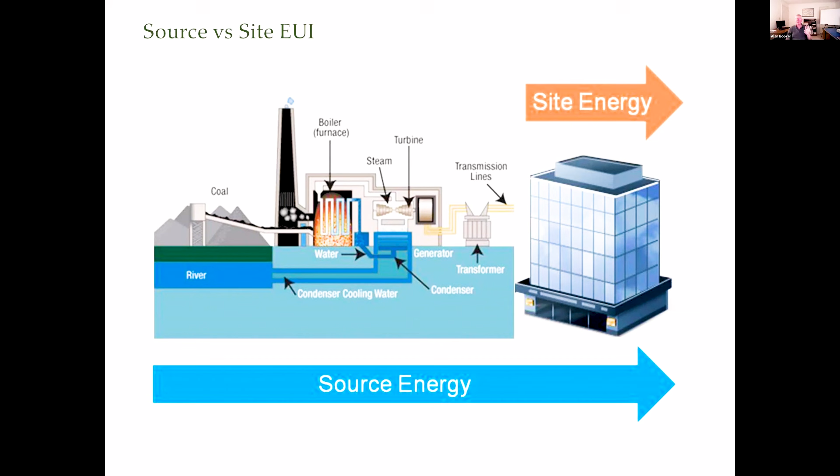If we want to do an apples to apples comparison, I've got to go back and look at the coal that you burned. What percentage of that actually got turned into electricity in the first place? What percentage of that made it to the site based upon transmission and distribution losses? Taking all of that into account gives us source EUI. To me, if you're going to do a real analysis, you have to do source EUI. Although most numbers quoted are site EUI, it hides all the losses in the big infrastructure, distribution, transmission, etc.

Here is a table that I pulled together, source versus site EUIs for different kinds of common buildings. You're going to see that a fast food restaurant is about the worst thing you could find. And it makes sense if you think about everything that's going on in a fast food restaurant: 886 kBTUs per square foot per year. Yikes.

Now, EUI is oftentimes calculated for just commercial buildings. It's not often used in single family dwellings. It's sometimes used in multi-tenant units, so oftentimes you won't see this. I've seen source EUIs for a lot of homes in the 50 plus range. The reason I'm pointing this out is that when we really do apples to apples comparisons of how effective and efficient a rocket mass heater or carbon negative mass heater is, we have to insist on source EUI instead of site EUI.

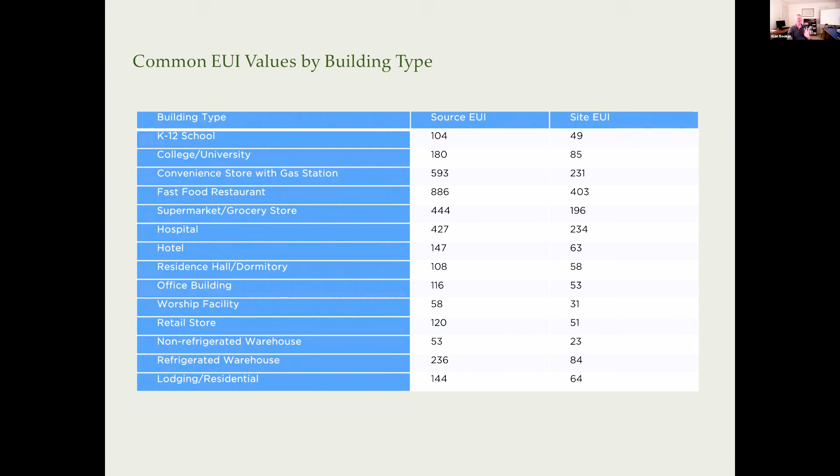Okay, so I'm not going to have time to go into all that math. We're just running it, and there's still a lot more analysis for us to do. But I can tell you that by using all of the strategies I've talked about, passive solar, annualized thermal inertia, geothermal tubes, green roofs, high efficiency building envelopes, I'm looking at a building that I'm building for an eco-village project right now in central Alabama.

Our guesstimate is those buildings will need a 6-inch rocket mass heater, 400 square foot per side of a tiny home duplex. My guess, based upon my best calculations at the moment, is that our EUI, including the rocket mass heater, source EUI will be about 3, okay? Maybe 4, okay? All right, so that gives you an order of magnitude that we're looking at.

So when we come down to a final comparison, I think we can show with hard numbers, much more efficient than any other wood-fired alternative, much lower technology and embodied energy, pollution, carbon footprint than even a geothermal option. Electric heat pumps require electrical infrastructure with the energy pollution and embodied carbon that brings, which means that amortized stuff is in there, plus all of the high tech and footprint of building all of the heat pump stuff, maintaining it. Solar PV powered electric options have the problem that power generation is often lowest when heat is most needed.

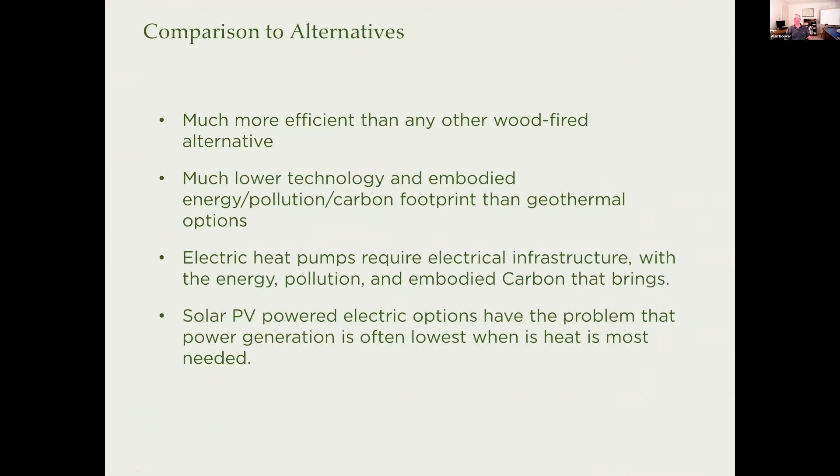Are we coming up on the finish line of this presentation, sir? Yes. So I called it. Yes. Yeah. I haven't played with the Davis. If you have any good recommendations or anything, just message me on that. I would love to hear about it.